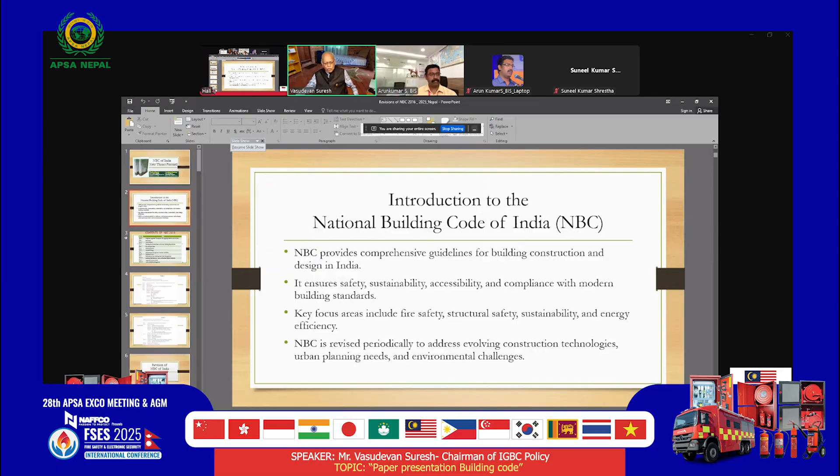I'm very happy you are having the thrust on fire safety and electronic security as far as this session is concerned. The building code is revised periodically to address evolving construction technologies, urban planning needs, and environmental challenges. No wonder after the 1970 version came, we had revised it over time.

The building code has got 12 parts. Starting with integrated approach, prerequisite for applying provisions of the code, coordination between all the professionals - multidisciplinary professionals, architects, engineers, structural engineers, fire engineers, MEP engineers, all concerned. That is Part 0, on coordination and integration.

Part 1 is all about definitions on all the parts of the code. Part 2 is administrative provisions, covering all the procedures required for the building permit and development permit, occupancy permit, including the NOCs from the fire and other authorities in a large way. It covers the administrative aspects not only at the level of building permit stage, occupancy permit stage, demolition permit, and all the related areas.

More will come shortly. Part 3 is on development control rules and general building requirements - all that is required to be done up to the plot, development control rules in the layout, subdivisions, for all situations. And of course the general building requirements - what should happen within a plot in terms of all the planning requirements.

Part 4 is very important, very relevant for your session. I understand yesterday Sandeep had already presented - our particular thing is also associated with the program on fire and life safety. Very important document, as good as mandatory, adopted by all the fire authorities, and the NOC from the fire authority is a must for giving a building permission.

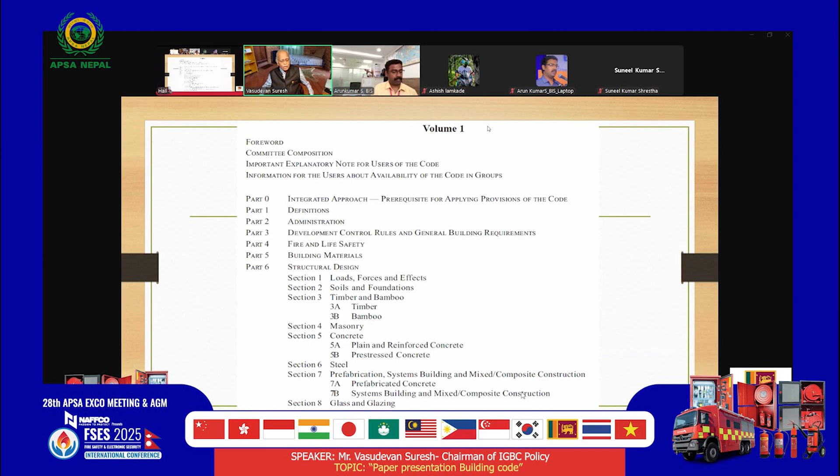Section 2 is on soils and foundation. Section 3 is on construction using timber and bamboo, very important. Section 4 is masonry, equally important for Nepal, stone and brick masonry, concrete - both plain, reinforced, and pre-stressed. Then steel, including composite construction, you'll see it very shortly. Section 7 is prefabrication systems building and mixed composite construction, and a segment on glass and glazing. A large number of buildings have the envelope with glass and glazing as a structural envelope.

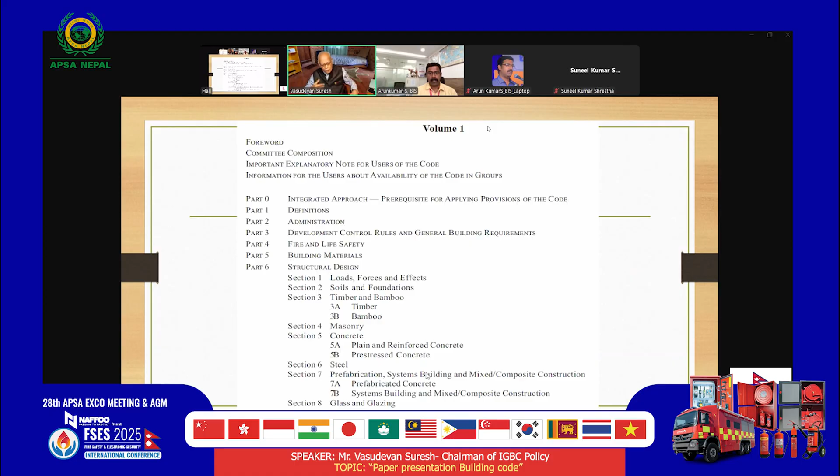What does it mean for structural designers? Very important, not only for the lighting and ventilation people, but also the heat insulation people. That brings us to the next component, part 7 on construction practices.

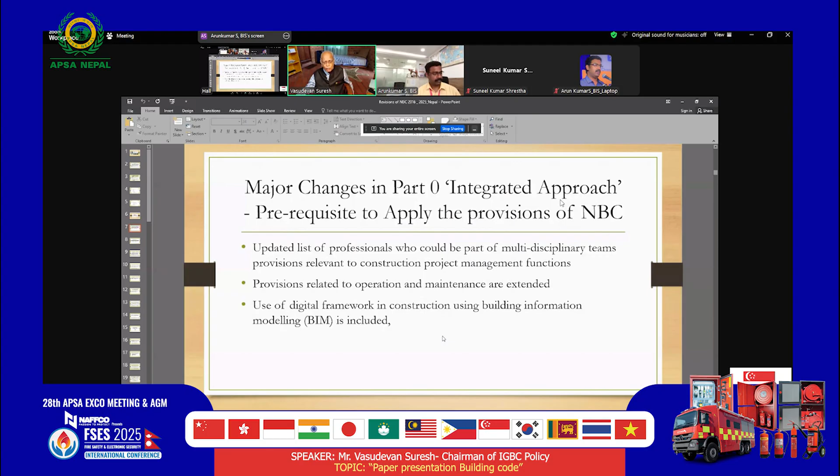Part 0 is the integrated approach regarding the prerequisites for applying the provisions of the NBC. This is a very important one where multidisciplinary teams work together - architects, civil engineers, structural engineers, geotechnical engineers, MEP engineers, landscape specialists, fire specialists, including groups dealing with green building rating. Coordination and integration is a major area, including operation maintenance, post completion, how the asset and facility management team takes over, and how all professionals can work together.

This gives you the particular - for the first time we have brought in BIM as an important component, the digital framework in construction using building information modeling, also included in part 0 of the 2025 version, which will also later come in part 7. Next please.

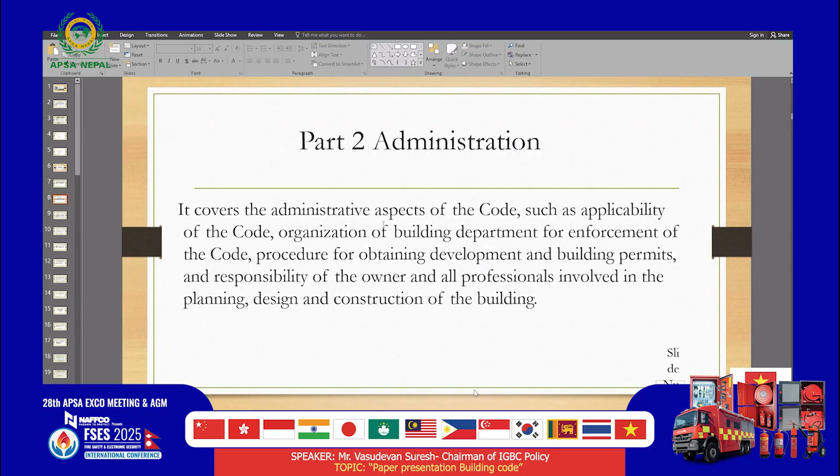We are given not only the qualifications, but also the competence and the level to which they can work. The next slide will give you further how we have, for the first time, included fire professionals and the type of requirements that have come in.

So you see we have simplified the detailed requirements of the permit application. We also include reporting and review mechanisms for high-rise buildings and special buildings, and procedures for permits, plans, process, and demolitions we have brought in for the first time. We also brought in improved oversight for periodic renewal of permits. Even if you get a building permit and the building is in operation, on structural audits, electrical audit, and fire audit, we brought in a 3 years or 5 years time period for renewal.

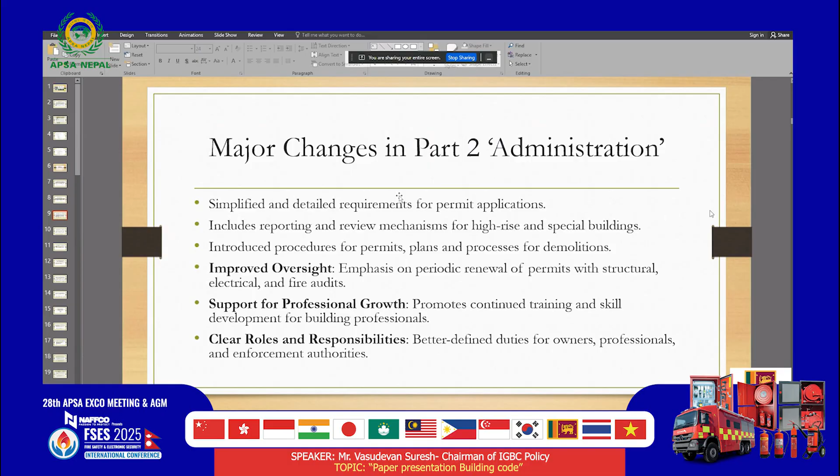This is again a very important cross provision in the building code. We are adding the right level of professional participation for the people dealing with this, and clear roles and responsibilities have been added for all owners, professionals, and enforcement authorities. This is very important: the people who sit in judgment to deal with the plan of any particular developer, or the construction department, or the government, should be not less qualified. They should be equally qualified to pass judgment on that.

So continuous training is required on behalf of the enforcement authorities. An enforcement authority can be not only the municipal corporation or municipalities, but also all the fire authorities, water authorities, pollution control, environment control, and fire people. All those people together are the enforcement authorities.

This is important because it encourages the involvement of the public in case of development work, building activities, special large buildings. Not only submission of the plan, but electronically you also submit - you don't require all the bundles of papers. Electronic filing of things is equally an important one.

We also identified the structural design basis report as an important component added in the building code for the first time, especially for earthquake zones, wind zones, and tall buildings of 50, 60, 70, 100-story buildings. So the structural design basis report is an important component for any building - special building or high rise beyond 15 meters or 500 square meters of area.

We also rationalized the activities involving alteration which do not require notice to authorities, and the format for applicable fees and charges has also been included in this in a very detailed manner.

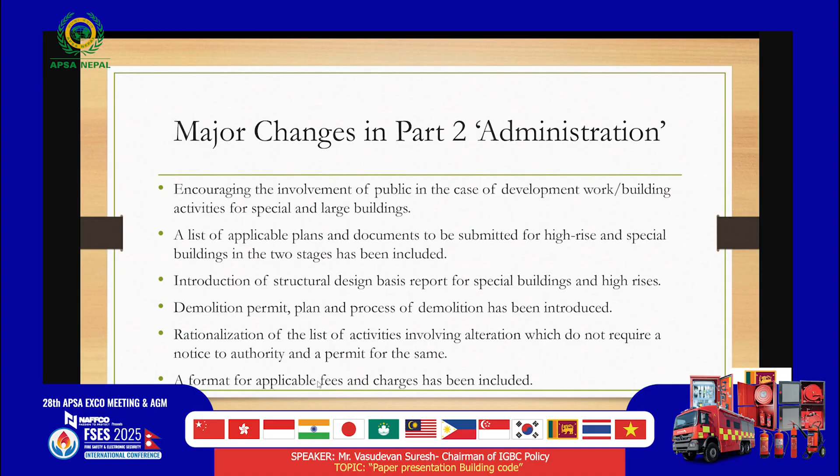Going forward, next slide please. That will bring us to further provisions on requirements in respect of all concerned professionals. We are given a useful flow chart for easy processing and approval, with time limits given for all NOCs to be given by the concerned line department, grant of sanction, refusal, occupancy permit. The structural design review can be done, rationalization, responsibilities of owner, part occupancy certificate in case the whole building is not completed or only part of it is completed - how we can do that.

Periodic occupancy renewal certificate for structural, electrical and fire - this is a very important clause added. Once we got the occupancy certificate, we never got into it again, but now we feel that's an absolute must that has been covered in detail, and permits also for signages, hoardings and outdoor display structures has been added.

As indicated, qualifications of all professionals, including fire protection engineers, have been added. For the first time, we have put in requirements for people who are dealing with fire-related work. What should be their minimum qualification and competence has been added, including, for that matter, the peer reviewer or proof checker for structural design.

So you see, Part 2 is a very comprehensive provision of the building, the development or the built environment, dealing not only with planning, design, construction, completion, occupancy, and performance of the building, but also till you can declare a building unsafe, till demolition, what needs to be done. All the procedures have been completely identified in a detailed manner.

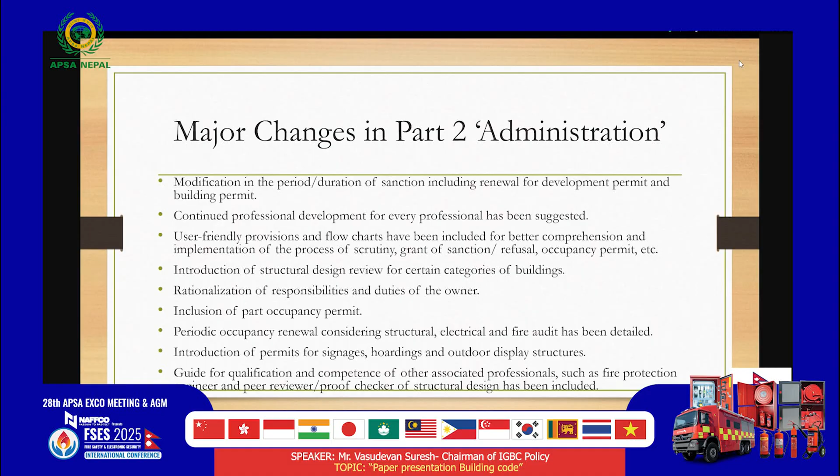Going forward, you have Part 3, which is the most important clause on development control rules and general building requirements to ensure health and safety of the public. All the planning norms, town planning requirements, the spatial requirement in a 3-dimensional form of X, Y, and Z are all covered in this particular thing in a very detailed manner.

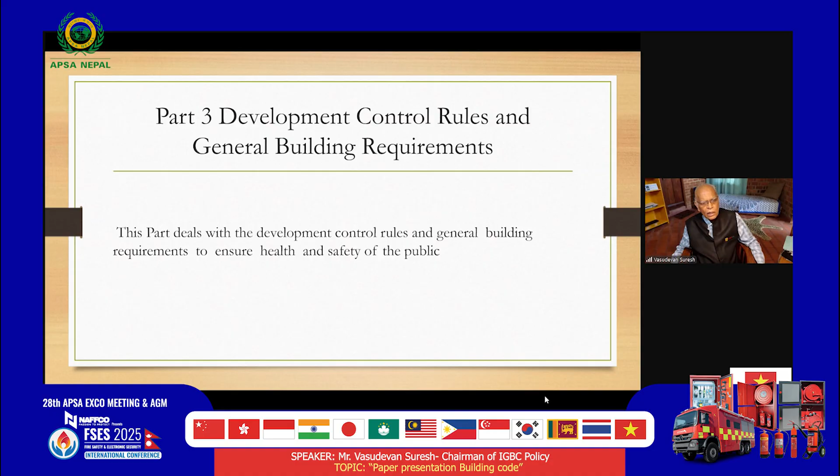Let's proceed further to the next slide. It covers enhanced accessibility with updated provisions for the elderly and persons with disabilities, including gender-neutral design, accessible transport hubs and specialized washrooms, urban design features including guidelines for spaces for creches and old age homes. It also covers coastal area development.

We have 7,500 kilometers of coastal area on the Bay of Bengal and Arabian Sea, and we have to cover the special requirements for that. We have updated land use provisions added, with revised classification for better urban planning, and improved access standards for roads, pathways, and means of access.

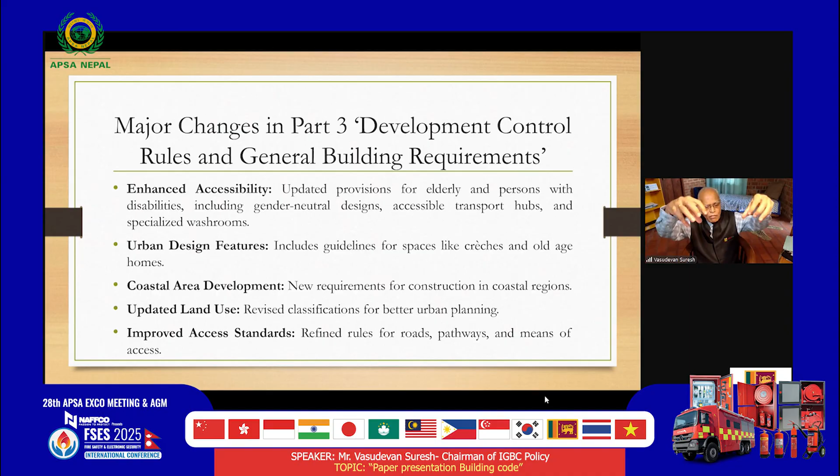This is very important from a fire point of view - how do you reach a particular building? Whatever clauses are required for the road concerned, the type of development, including the way in which you will be able to reach the building, are covered, including the required turning circle, etc.

Please go forward. The next slide will give you all the parking requirements that have been updated, reflecting the concept of all the parking spaces, including the ECS - the equivalent car space, including 4-wheelers, 3-wheelers, 2-wheelers, all the provisions required.

We also covered electric vehicles. Now that EVs have come in, what percentage of the car parking should be EV, because charging points are to be provided as part of the electrical installation in residential buildings, commercial buildings, malls, etc. Electric vehicles have been brought in over there.

We also brought in, for the first time, provisions for preventing crime and resilience against extreme events. As I already mentioned, coastal area development has brought in a lot of new tools for transferable development rights, accommodation reservation - these are all new planning norms. Compensatory floor area ratio, reservation credit certificate, purchasable floor area, transit-oriented development, all have been covered in detail.

Effectively, it covers not only all the development at the macro level, but also the micro level within a particular building - spaces within the building, how do you deal with each space, the minimum width, the area, the heights. All those details are covered, which normally the planners and architects deal with, including, of course, the engineers.

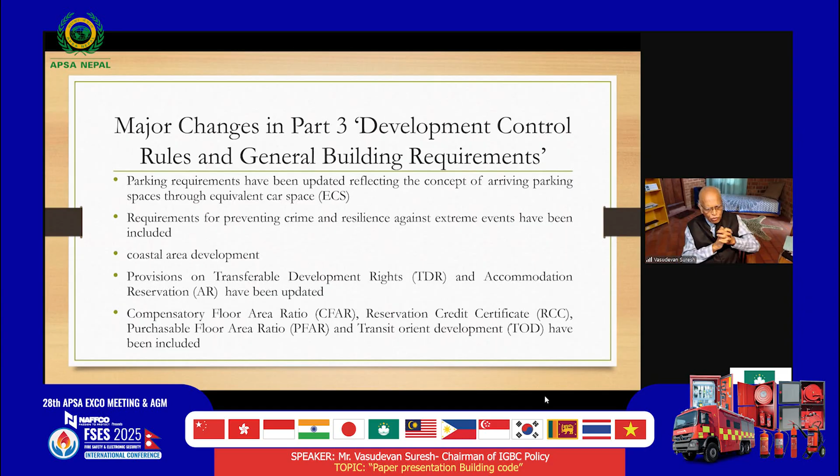Next please, can we go forward? That brings us to fire and life safety. I'm very happy that this has already been covered in detail yesterday by Sandeep Goyal and also partly by Shruti yesterday, so I won't get into it. All of you are gathered here, but I would have loved to speak on it for the whole day.

Fire prevention, life safety, and fire protection are the major areas of concern here, and we have gotten into it with a large number of increasing provisions. And you'll all be very happy to know that in a day or two, the Part 4 Fire Protection of the Fire and Life Safety, National Building Code 2025 document will come out for wide circulation.

I invite all participants in this program to kindly go through this document and give valuable comments. There are a large number of changes coming in the fire and life safety portion versus the provisions covered in the 2016 version of the National Building Code. As I told you, there were Building Codes in 1970, 1983, 2005, and 2016. So this 2025 version covers all the requirements for the nature of buildings in this particular area.

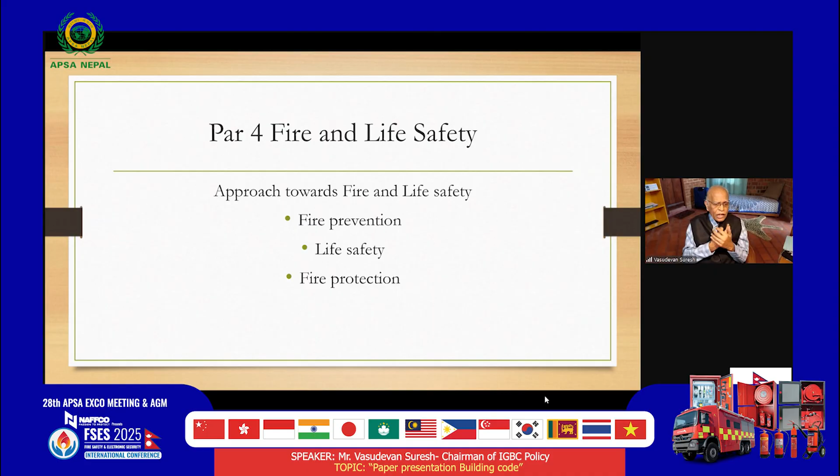Going forward, can you go to the next slide please? Enhanced fire protection standards, revised minimum firefighting requirements based on hydraulic calculation, updated fire resistance ratings for roofs on account of intermediate service and installation, clarifications on building design and usage, clear guidelines for measuring building height for different occupancies, because the requirements of firefighting also depend on the height of the building.

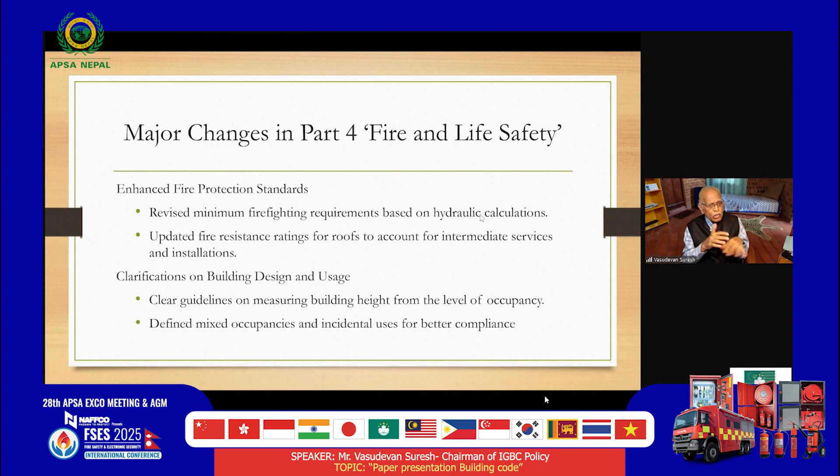Mixed occupancy is a very major component of residential, retail, and commercial coming in the same building. How do you deal with the right level of compartmentalization and fire resistance rating between one occupancy and another is covered in detail, covering practical requirements from a compliance point of view. This will become a very important clause of mixed occupancies horizontally and vertically within the building in a very large way.

Improved safety provisions on exits, with detailed requirements for exits, fire exit staircases, and occupant load. We have the fire tower concept which has become very popular, and this has been included and expanded in the 2025 version.

Fire safety measures for commercial kitchens, and Table 7 is a very important clause, completely revamped, covering all occupancies of the building and what nature of fire protection is required - be it wet riser, dry riser, sprinklers, or detectors. All the details of water storage requirements for the heights of buildings have been covered. Table 7 is a wonderful document.

We have covered high rises, EV parking areas, data centers, and in particular, transportation hubs like metro stations and train rails. Fire safety and life safety become important components in all such buildings because a large number of people congregate at one point of time. So those have been covered in a very large way.

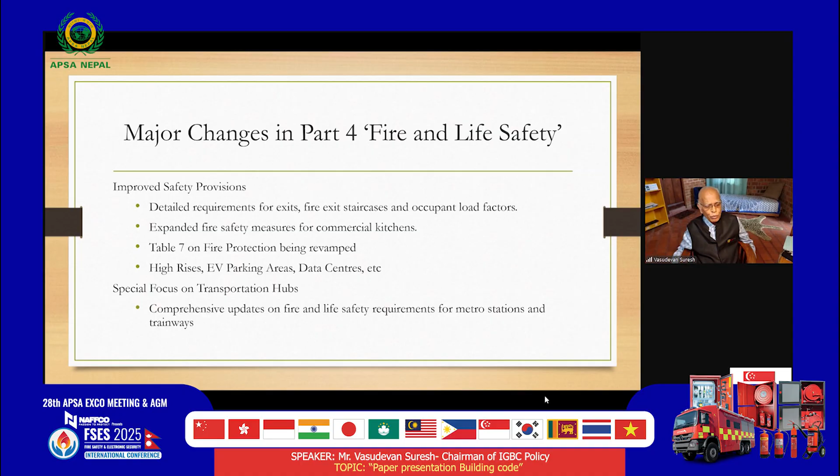This is important because Part 4 of the National Building Code has various clause numbers given, but this has a lot of linkage with our document on Part 6, Section 5 on concrete. For the first time, structural designs account for the fact that if you want a higher fire resistance rating of 2-hour, 3-hour, or 4-hour, the cover required for that design has to be more - it cannot be lesser. With additional cover, the fire can't reach the reinforcement. Therefore, structural engineers and fire engineers have to work together.

A very important clause has come in - minimum dimension for reinforced concrete members for fire resistance, and nominal cover to meet the fire resistance rating. Similarly for steel structures, between Part 6 Section 6 and Clause 22, 25 and 26 are covered - how steel-based construction will deal with fire resistance rating in terms of cover.

Electrical installation has many clauses - cable types, FR, LSH, metal sheets, security integration, location of MV, LV and switch rooms and other substations, smoke management systems, underground metro stations. These are all electrical installations but have fire resistance impact, so we covered between Part 4 and the concerned section. One part of the NBC is on the left-hand side, the second is the NBC Part 4 clauses, and the component is covered in between.

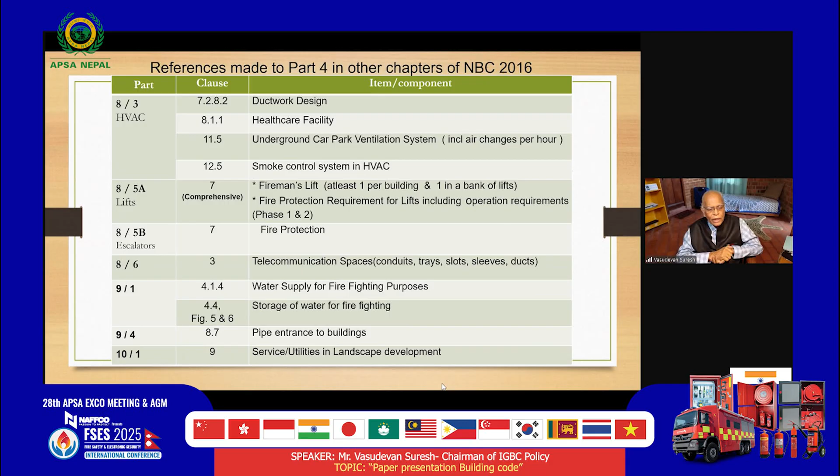Going forward - kindly wait for the next 2 days' time. Part 4, Fire Protection, National Building Code 2025 document will become a public document. Everybody can participate and give their valuable comments on that. We are extremely happy that we have tried to make it a state-of-the-art document, as good as any document anywhere in the world, keeping India's development requirements over the next 15-20 years in mind - heights of buildings, nature of occupancy, etc. Everything has been covered.

Part 5, building materials, is all about new building materials - be it cement, steel, glass, aluminium, brick, whatever. All the 500 odd building materials are covered, including permitting innovative and alternative building materials, provided you can prove they are good enough for construction, performance-wise, and that they work well. So if you don't want to stop any new material from coming in, there's an enabling provision to provide for that.

And alternative construction - encouraging modern, efficient, resource-conscious building technologies, green products, less embodied energy-based building materials - as long as it meets functional requirements: structural sufficiency, thermal insulation, sound insulation, water protection, all those functional properties of a building material. We don't want to stop that. If I have a new product, I'll permit it, provided that product can withstand use as a wall or a roof or a door or whatever. We don't stop that.

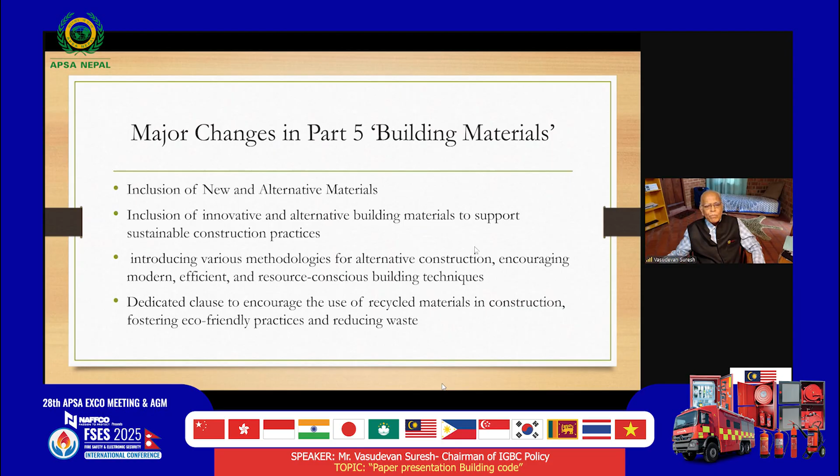This brings us to the most important clause, Part 6, structural design. Next clause please. The structural engineers will play a very, very powerful role in this particular clause. Yeah, there you are - and this has got, as I said, 8 sections.

What I will take maybe one slide later on - I'll request Arun to open up on that, my colleague who is working on the National Building Code clauses. We have a separate specialist panel for each one. By the way, each part of the National Building Code has got a specialist expert panel to deal with it. Everything I told you up to Part 1 to Part 5 - they are special. There were 23 expert panels, with about 1,300 expert members working on that.

Structural design, loads, forces, and effects will cover not only the requirements of live load and dead load, but all the imposed loads coming in terms of forces - earthquake forces coming below the ground, wind forces coming above the ground, and landslide loads, etc. - all have been covered in a very, very detailed manner.

I'm extremely happy and proud that this particular part covers not only IS 875 on wind load, IS 1893 on earthquake codes, but also cyclone-related issues - they've all been covered. All the structural engineers sitting in this group revised the design earthquake hazard across the country comprehensively, based on probabilistic consideration, with the deterministic hazard taken as a minimum. Displacement hazard is also brought into focus.

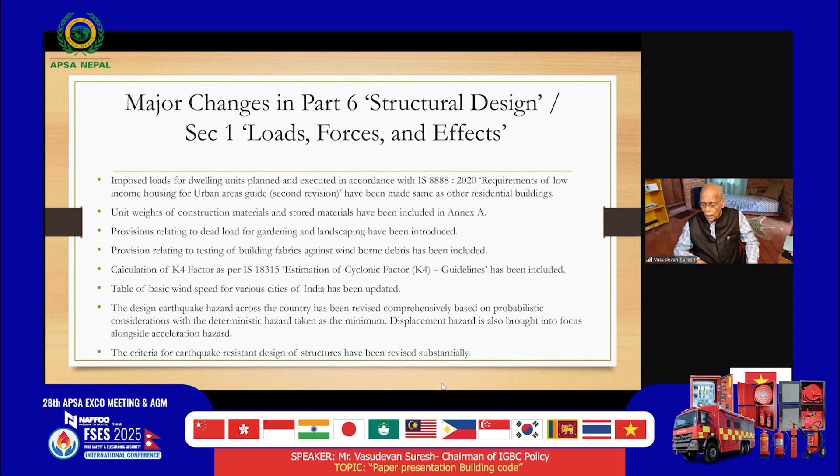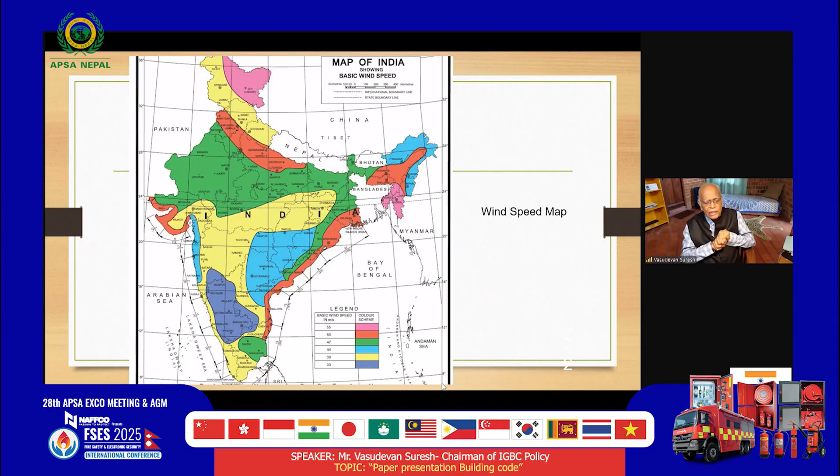If you go to the next slide, our seismic zoning map has also undergone a major change. This, of course, is a wind zone map, which is available depending upon the pressure coming from typhoons, cyclones, at periodic intervals - that's what we deal with there. If you go to the next clause, you'll see the next one on the earthquake code.

A seismic zoning map - the 2016 version has only 4 zones, from 2 to 5, with Nepal mostly coming under zone 5. But I want to indicate that the new National Building Code 2025, covering IS 1893 latest version 2025, has got 6 zones. That means the earlier zone 5 has now been made into zones 5 and 6 - those which are more intense, especially in that area. I think the Nepal region, which is co-terminus with our particular area, will partly come under zone 5 and zone 6. This is very, very important, because the design forces for earthquakes have all been rationalized in line with the latest provisions.

You are keeping on seeing the type of earthquake damages in neighborhoods, in Myanmar just a few days back, as well as recently in Bangkok, and what's happening in Indonesia. So we want to be sure that our provisions of the earthquake code are in line with the latest thinking on this particular subject.

So that is an important point at which I'll ask Arun to chip in and take over from here, starting from the next slide. Sure, I'll cover slides 7 or 8, and come back again. Yeah, please go ahead. Thank you, Suresh. Good morning, everyone.

So apart from the wind speed map and the seismic zoning map of India, a good portion of the hills in the country receive snow. This map gives the intensity of snowfall, collected based on a periodic study of snow accumulation at various parts of the year. Based on that, the map has been derived, and it serves as a basic guideline for a structural engineer when he designs a roof, whether it's a flat roof, a hip type roof, or a sloped roof.

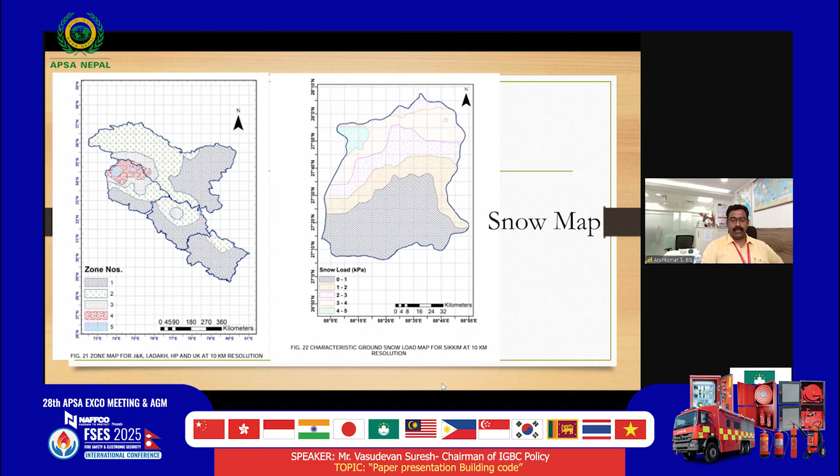What factors should a professional ensure so the design is sufficient for that particular snow load to be accounted for? These are some states in the country where snowfall has been found abundant, and that load of snow has to be factored into the structural design of the roof elements, and accordingly from the roof elements to the columns, beams, and all the way up to the foundation. A detailed calculation is also suggested in Annexure M of this draft of the NBC.

At times, even after the snowfall, there's a ponding effect due to melting snow, and a mixture of water and snow remains for a considerable time unless totally drained out. The safety aspects to take care of here are also given. More importantly, the provisions relating to blast loads are an option, not mandatory for all buildings. We've left this Annexure Q for professionals so they can decide along with the owner.

In the next section, as you'll see in the next slide, we'll be speaking about structural design using steel.

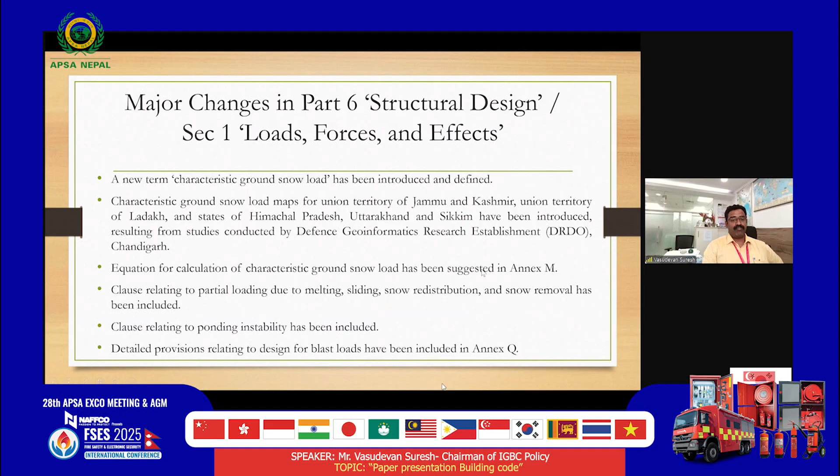Regarding soils and foundation, once the entire load has been ascertained in a building, that load has to be safely transferred back to the soil. It's not always possible to have virgin soil with enough bearing capacity; sometimes it's reclaimed soil or filled up earth. First, one needs to ascertain the bearing capacity or strength of that particular soil, and a variety of techniques have been mentioned in the standard for how a professional will ascertain this, done either by manual or mechanical means.

Some of these methods include wash boring, as given in the fourth point, and pore water pressure measurement, because the presence of water in the soil reduces bearing capacity. Similarly, seismic tests are detailed, since standardizing a test method is most important, else the parameters are bound to vary. So the role of the standards body in firming up that test method has also come in.

When the size of the building is quite huge, you may need multiple such analyses of that soil. It's not just one site or one pit, but multiple pits across the site. All this is given, including SASW test, MASW test, and dilatometer test.

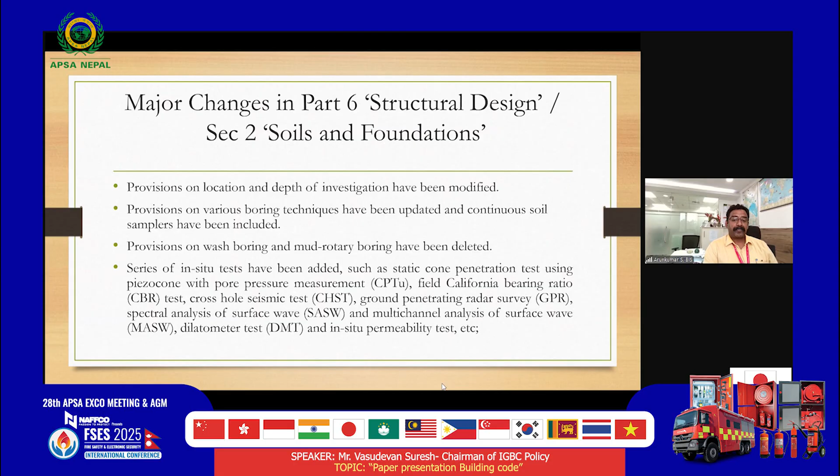This time we've included details on optical and acoustic televiewer methods. When piling or pile type foundation work happens, one can put a camera to visually see the stratification of the soil as we go down, giving a realistic appreciation of soil change at various depths. Pressure meter test has also been detailed, along with deep foundation, which is essential because building heights are rising day by day, with very tall buildings from 50 meters to 250 meters already coming up in a big way across various cities in the country.

Special types of deep foundations have been included. Last week only, the combined pile raft foundation standard was released by the BIS with a separate IS number. Provisions of that have also been included in section 2 on soils, and instrumentation techniques have also been detailed for the information of users and professionals.

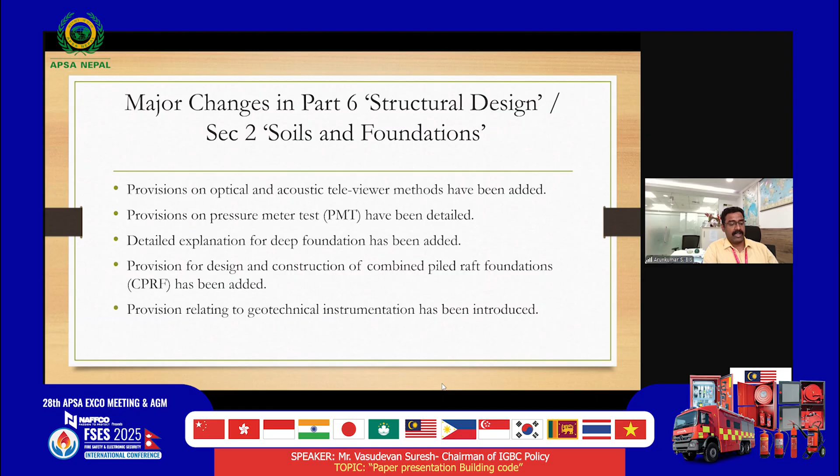Next is section 3 on timber and 3B on bamboo. In chapter 3A, not only virgin timber but also engineered timber can be used by professionals. What are the requirements and properties of engineered timber, particularly cross laminated timber? How do you ascertain those properties, what amount of glue goes into that CLT, what parameters are to be evaluated, and what is the test method for evaluating those parameters?

Based on the test values only, an engineer will arrive at the sizing of the element, be it a timber CLT element, beam, column, truss, rafter, or any other foundation element, or a roof slab element. But use of timber has to be done properly.

We just heard another presenter, Dr. Basro, mention forest fire in a big way. Such fires can obviously happen within buildings also. So how do you ensure that buildings are fire safe, particularly timber buildings? These aspects, apart from Part 4 of NBC, are also covered in section 3A in this revision.

Any material should be used to its full maximum potential lifetime by suitably preserving and protecting it. Timber and bamboo are such organic materials. They need to be properly protected from the effects of borers or termites, etc., so that they can have a prolonged life.

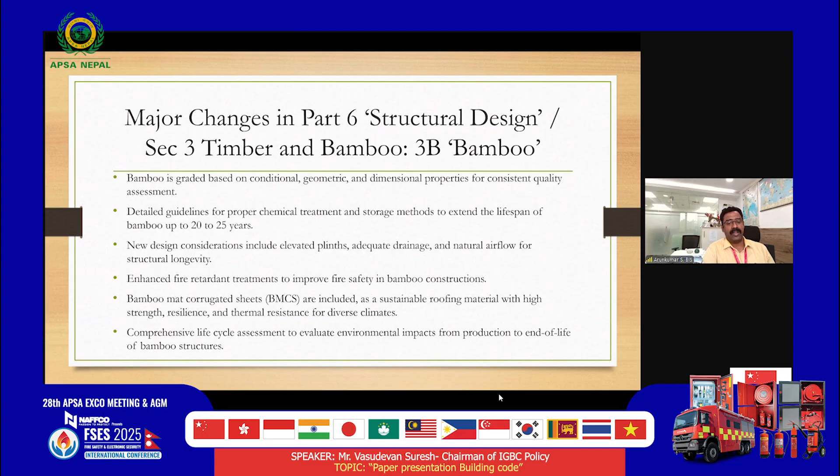Next comes masonry, which both India and Nepal share in common. More than 90% of construction in the country is masonry. The NBC has been very clear that not more than 4 stories, that is ground plus 3 stories, is permitted for fully 100% masonry construction. Otherwise it is called infilled masonry in RCC or infilled masonry in steel building construction. If somebody has 100% masonry, then he cannot go beyond 4 stories. That clarity has been brought in.

Newer types of masonry bricks and blocks, including using locally available clay and earth strengthened using cement or gypsum, have also been permitted. There are limitations in use of, for example, rat trap bond masonry, only up to 2 stories. That has been clarified, very effective for the seismic regions of both Nepal and India. We can use confined masonry and reinforced masonry, for which detailed provisions are given.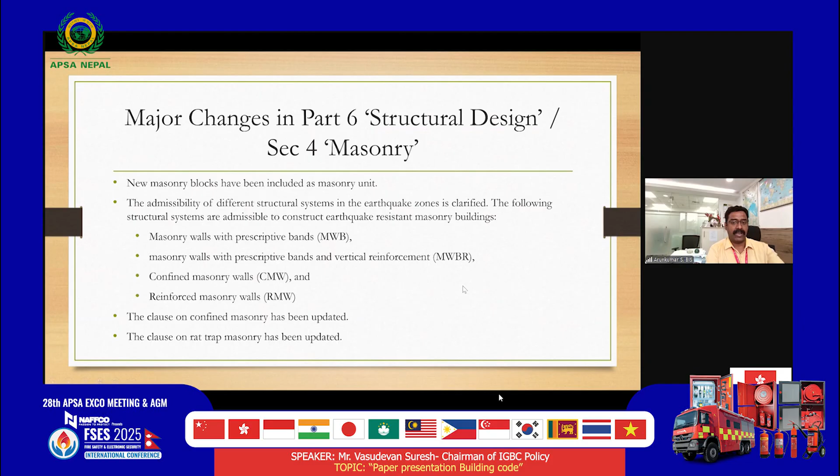There are many new materials coming up in the name of high strength steel and high strength concrete. The requirements, limitations, and permitted usages are all being provided in this revision of section 5 of NBC. The design service life has been brought in, and most important of all is the fire resistance rating.

Regular concrete has got, say, X minutes of fire resistance, but if you have high strength concrete, you will be surprised to know it has got a lesser amount of fire resistance rating. The high strength concrete turns brittle when subjected to the same fire temperature. So how do you protect that particular high strength concrete? Those guidelines are coming up in the fire resistance chapter.

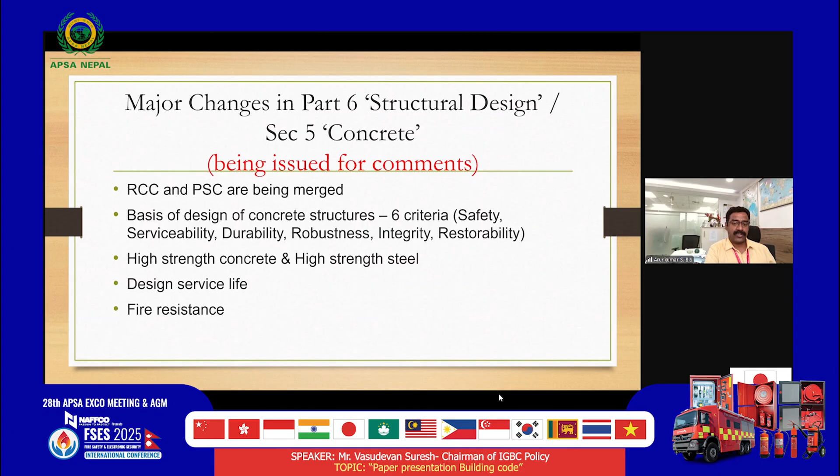Next 3 slides are regarding steel as construction. Structural steel is nothing but IS 800. What we have done in this revision is the steel chapter, section 6, is divided into two: only steel, and then 6B on steel concrete composite.

Coming to steel, the basic materials are taken up from our MTD metallurgical division, for example IS 2062. That metallurgy department has also got separate Indian standards on fire resistant steel, weather resistant steel, and steels which have performance with respect to seismic effect, that is the US by YS ratio - ultimate strength by yield strength ratio.

That is all guaranteed when a person goes for IS 15962 steel section, so that it can be used in earthquake prone regions, so that your construction joints, particularly beam column joints, will perform properly, and give enough warning at those beam column junctions. So a building, in case it is subjected to an earthquake or dynamic loading, will not crumble at one go. That is a warning, and based on that warning sign, the owner or inmate can get out of the building and structural intervention can happen.

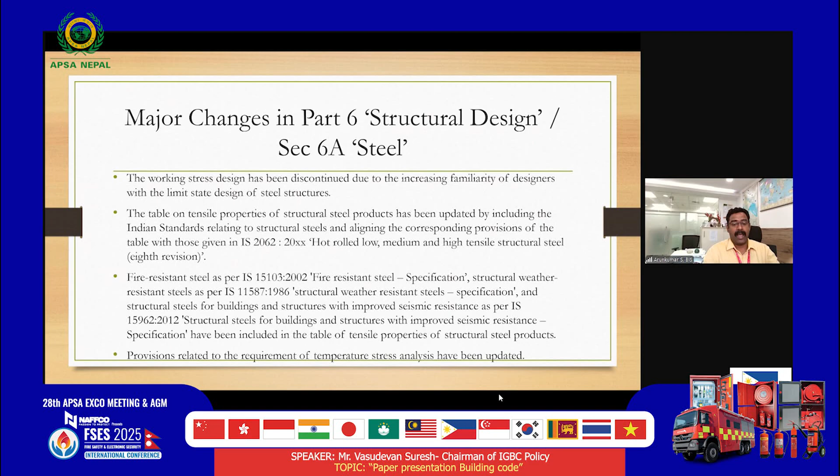Next 2 slides you can skip, it is all big way detailing on steel only. In this country also, in India also, steel as a construction material is slowly picking up. You can skip this one.

Next, on 6B, steel concrete composite construction - traditionally that has been used only in bridges and flyovers largely, but that has now been permitted in buildings also. So what are those shear connectors and what are those performance requirements for steel and concrete, how that composite section is going to behave - the developments over the 11384 standard have all been covered in this chapter.

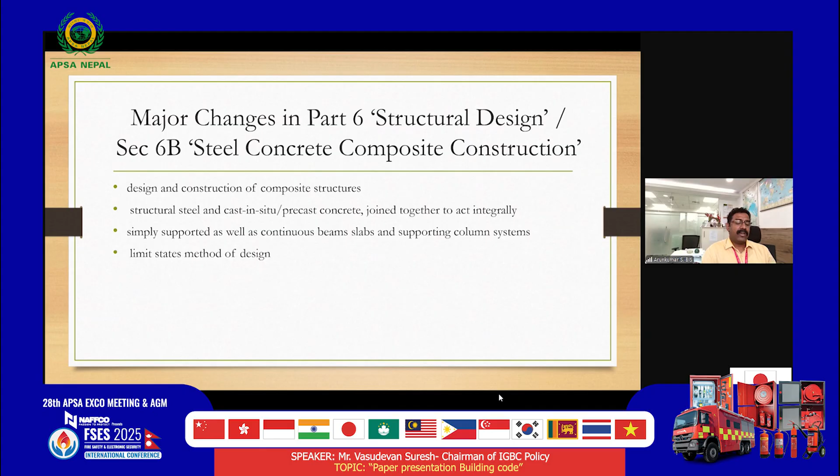In the next slide, industrialized construction by way of prefabricated concrete construction has been covered. The order of the day is to finish the building in the quickest possible time. That is possible if the entire element of a building is factory made and shifted to the site, assembled like Lego, and connected only at the joints. The code is very clear that it permits the wet jointing system and not the dry jointing system, because with the wet jointing system we can ensure that the column or beam or wall-column combination gains sufficient strength. And not only strength - the performance with respect to water in wet areas like toilets and kitchens will also perform properly.

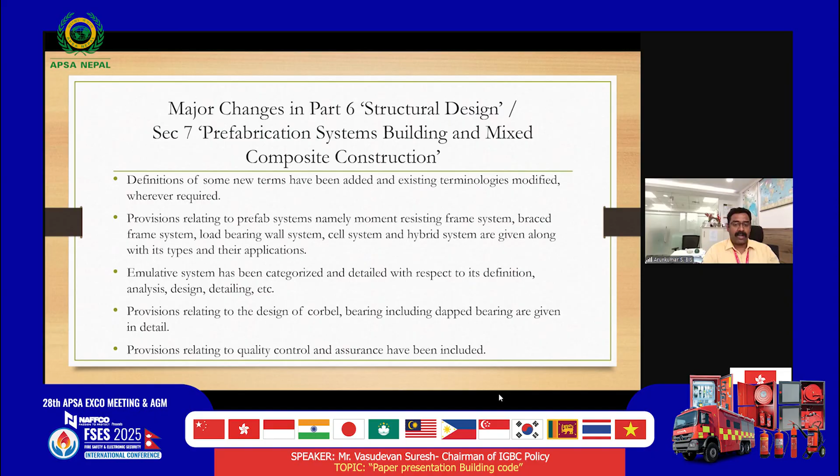In this revision, 3D printing construction has also come in, and more importantly, this PPVC - prefabricated pre-finished volumetric construction. So everything is set - it's not just a building element, a bedroom, a toilet or a kitchen - it comes with its electrical line, plumbing line, water line, even all its water closets, everything fitted in the factory. The unit comes in a truck. You only have to use a crane, put it in place, and then do the wet jointing. That's all, not even painting is required - you just have to connect the plumbing line and the electrical line. The building is ready in a matter of days. That is the level of introduction of these provisions in Annexure B.

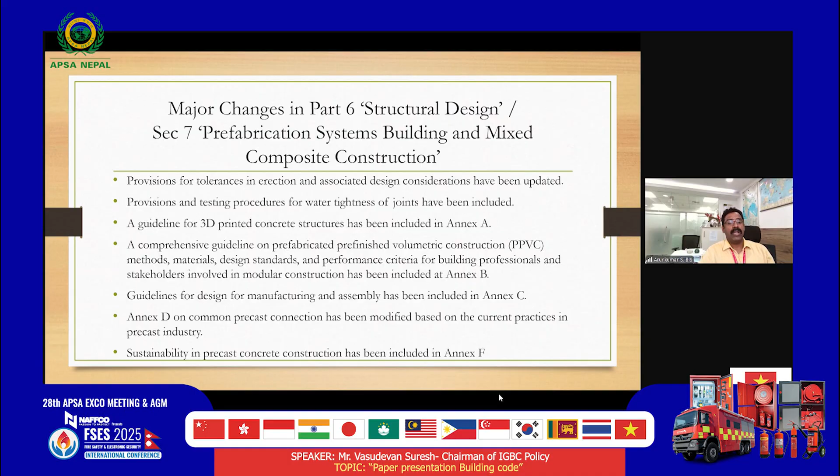And in Annexure C, in this revision, specific guidelines on the assembly have been detailed in this chapter. Next slide talks about glass in buildings, that is section 8. Mr. Suresh just mentioned that part 6, structural design, takes care of 50% of NBC, because that is the backbone or the skeleton of the building.

Not only now, but for about 15 plus years in the country, the use of glass has come up in a big way, not only in India but across the globe, because glass is such a material with which one can connect to the outside world. But both countries, India and Nepal, for example, have got plenty of sunlight coming in, so we should be very careful in only using the light portion of it and not the heat portion.

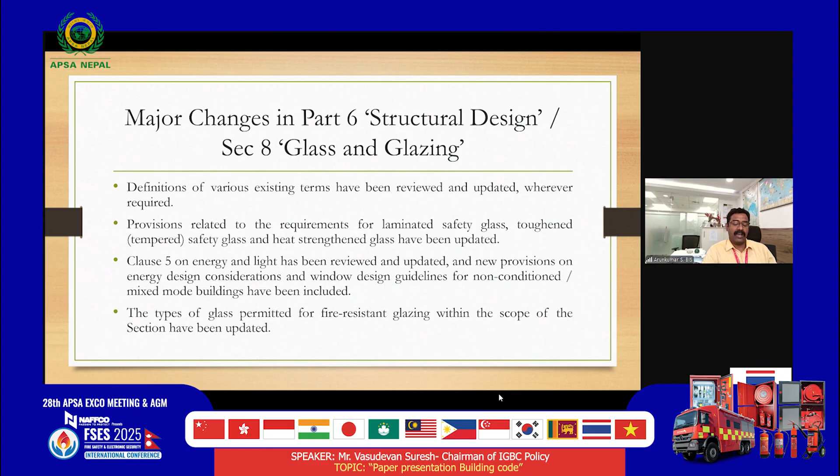So what are those requirements in terms of selection of glass, glazing elements, and framing elements, be it UPVC, timber, aluminum, stainless steel or any other plastic material? Those guidelines are given. The major revision in this is regarding fire resistant glazing. There are 8 special types of fire resistant glass which can be used, and it also talks about an optional category of blast resistance and bullet resistance.

This is not required for all types of buildings, but is required for specific building occupancies, say a politically important building, or the Reserve Bank of India, or hotels very near the airport. For such buildings, the airports authority itself has been emphasizing that certain facades or walls should have glass which ensures that no penetration of bullet, etc., is going to happen.

Next slide onwards, I would request Mr. Suresh to take over. It talks about part 7 onwards, on construction management practices and safety. Thank you so much, Arun, you did so wonderfully. Part 7 is all about practice. Now that you have designed the building architecturally and structurally and the material is there, you get onto the site for dealing with construction management, practice and safety.

It talks, for the first time, about including the construction demolition aspect. A large number of buildings, even redevelopment of an existing area, have to be demolished. How do you do that in a very systematic manner? It's been covered in detail.

All safety aspects are also covered there, and information with respect to BIM has been brought in a comprehensive manner for building information modeling of planning and design, so that everything goes in a sequential manner. Every drawing has to be linked to the BIM related drawings, and the clause for permit to work system has been added, ensuring stricter control for high risk activities and concerned sites.

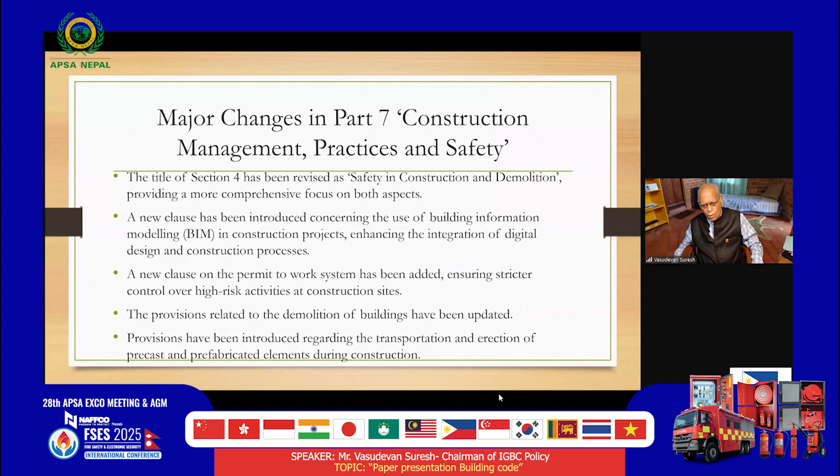This is regarding barricading and construction. I'll just say, shoring excavated soil, monitoring adjacent buildings so construction should not affect the neighboring area, improving safety and minimizing risk to the surroundings, and also making the construction management and supervision team responsible in a large way regarding anchoring of various non-structural elements and building services, because the service people will also come there.

As you see, the next parts are part 8 and part 9. After the main structural part comes, building and plumbing services come in. We have special provisions added for marine, hill and snowbound areas - what type of problems are involved in those environments, and construction safety related issues and what needs to be done have been covered in depth. I think these provisions will have substantial use for the Nepal context, which has hill and snowbound areas in a big way.

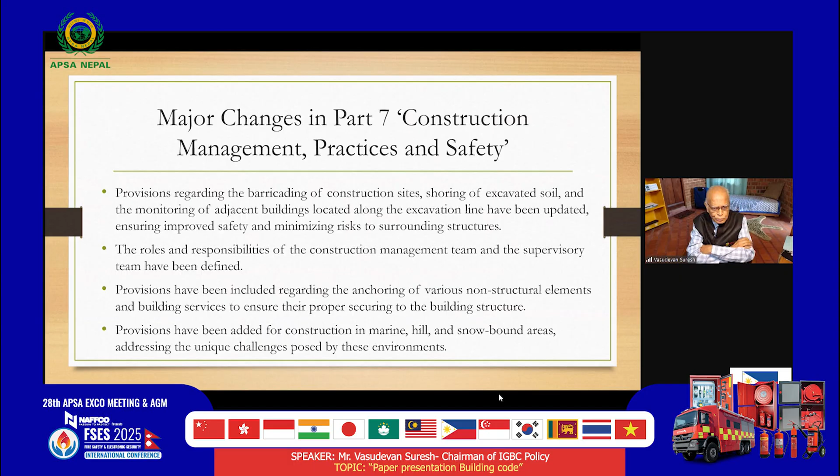Equally important are the non-structural elements and finishes. So structural, non-structural, and finishes and building services like fixing of glass and fixing for maintenance, all these have been covered in a very detailed manner.

The proficiency of construction engineers, not only the design engineer but the one who can supervise, and the construction engineer's qualification - because they are the ones going to be at the site to deal with that - the link with structural engineers has been brought in. We have brought a subtle difference between a structural engineer who can design it structurally and give the detailed drawings, and who can go and supervise. It need not necessarily be the same person; it can be from various areas, but the good-for-construction drawings with structural steel details etc. will be coming to the construction engineers.

The link has been brought in there, and special provision for thermal insulated glass and glazing has been added, along with development of emergency response and disaster management plans for construction sites - what will happen in case of especially hazard prone areas.

Something happens, a landslide or an earthquake or whatever, a mudslide, what needs to be done - all these have been covered in a comprehensive manner.

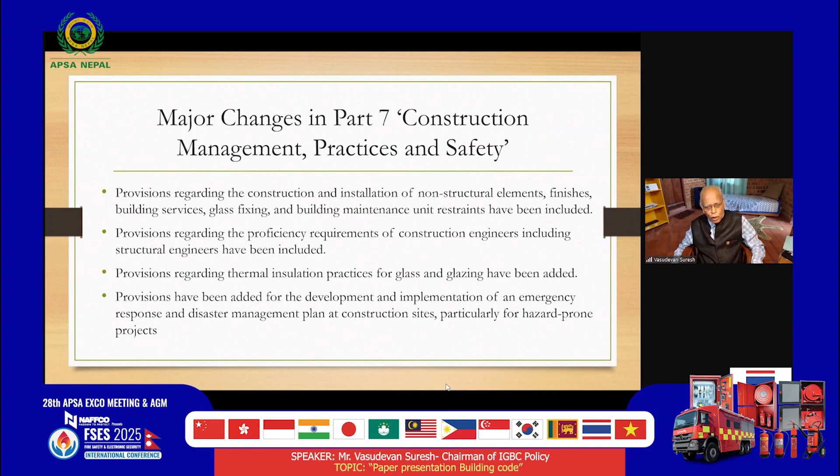A very important part, according to me, is Part 7. Going forward, next slide - that I told you is the building services one.

We've got about 6 sections. The first is lighting and natural ventilation, covering all aspects of it. As Arun said, 95% of India uses what's called the clear design sky, unlike all over the world which uses the standard overcast sky. So Surya Bhagavan is extremely useful for us - how you use daylighting in a large way, planning, right orientation of the building, illumination levels required, how to get light in and not heat. The circadian lighting system, outdoor lighting system, all have been put in a detailed manner, along with required illumination levels and how to deal with that, including artificial illumination aspects.

Natural ventilation is covered here, while mechanical ventilation comes in Section 3 on air conditioning. But artificial lighting will also come in here, especially during the night period. Orientation of the building is an important clause that architects, planners and engineers use, depending upon the movement of the sun from east to west, since we are in the northern hemisphere. Those detailed aspects are covered in a very minute manner.

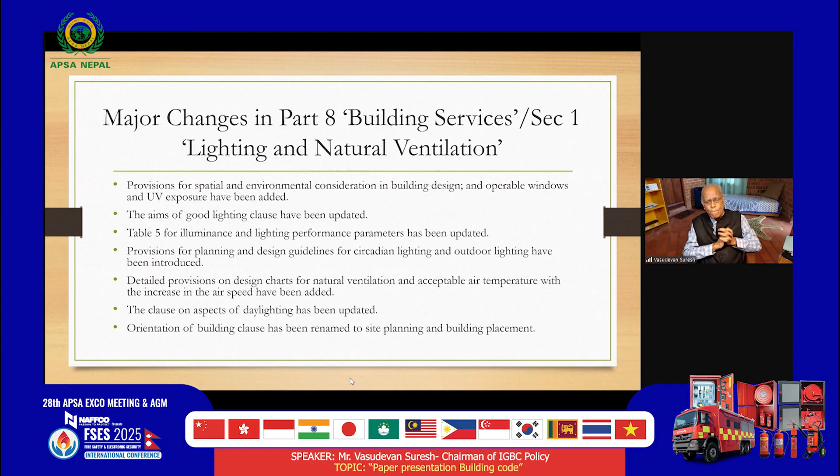Going forward - electrical installation, I think we already have covered. We are extremely happy and proud; this is a very important document. All buildings require power, and safe electrical installation is the most important thing the electrical engineer does, in line with the Indian electricity rules and acts.

Those provisions have been taken into account. We also have the National Electrical Code separately brought out by the Bureau of Indian Standards. The National Electrical Code will primarily apply at the higher level of electrical installation, but at the building level, everything comes in the National Building Code, Part 8, Section 2, electrical installation.

The electrical safety aspects - yesterday Shruti made a presentation already; she's also associated with this part in a large way, covering the planning of electrical installation and design issues on apparatus, etc. Where do you put the substation, transformer, standby generator, and the nature of wiring - right from selection, installation, circuit segregation, mitigation, and electromagnetic interference - all have been covered. We're extremely happy that this part was done with the best possible electrical engineers in the country, working with civil engineers, architects, the MEP team, and fire safety.

Whenever there's a fire, electrical short circuit is often blamed as the reason for the electrical installation. So we can't let that happen. We want to ensure safe electrical installations in line with the latest provisions required. More importantly, with renewable energy coming and linking with the grid - how do you link solar energy along with grid energy to be utilized in the building - that's also an important component, including electric vehicle charging points.

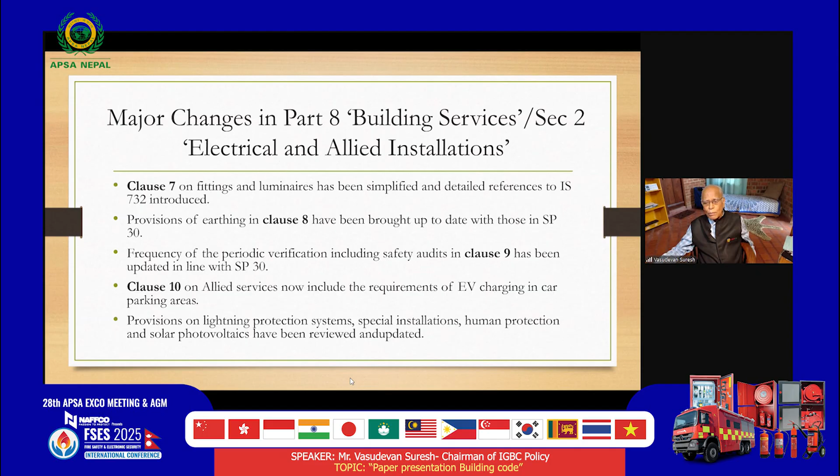Lightning protection is an important component - very high rains and all that, India has this problem, and you have it too. How do you protect buildings with lightning protection in a large way - special installations, human protection, we don't want any damage to happen, more so with solar photovoltaics, etc. What type of precautions are required has been covered in a very large manner. Can I have the next slide, please?

Yeah, this will bring us to the most important one, HVAC: air conditioning, heating, and mechanical ventilation. As I told you, section 1 gives only natural ventilation. Mechanical ventilation will come over here.

All aspects of the design of air conditioning have been brought in over there: new refrigerants, zero ozone depletion, minimal global warming impact, energy efficiency enhancement, promotion of software tools for precise energy calculation and system design, encouragement of energy efficient variable refrigerant flow (VRF), and inverter-based cooling and air conditioning, the best solution.

At one point of time, India used to have 150 to 200 square feet per ton of air conditioning. Today we have buildings with even up to 1,000 tons, done with 1 ton covering 1,000 square feet. Can you believe from 200 square feet per ton, we can now go up to 1,000 square feet per ton of air conditioning? The nature of air conditioning has undergone phenomenal change with the latest technology in that area. All of this has been covered in this particular part in a very detailed manner.

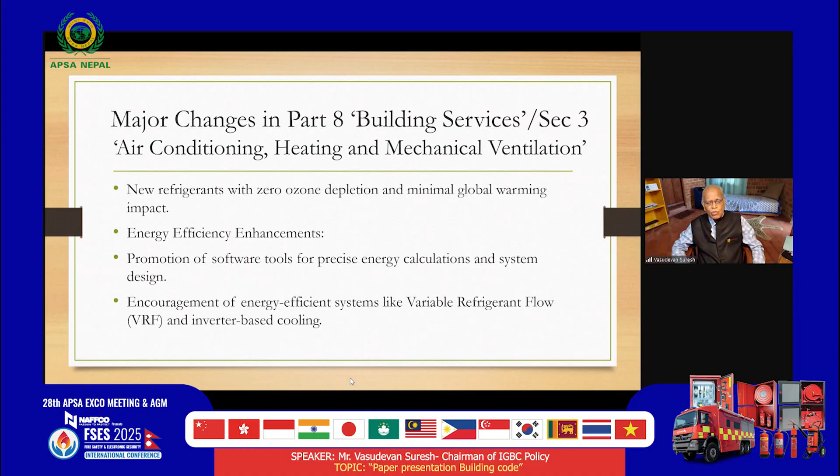Going forward, next slide please. Updated weather information is also available for all 60 cities for tailored system planning. Refined indoor design guidelines have been brought in for local climatic conditions. Cold storage is an important one. Refrigeration area, especially food preservation, is important, especially in Nepal and the hill districts, which also need to take care of preserving food, reducing waste in a large way.

Enhanced ventilation standards to ensure fresh air supply - this is an important component. Fresh air supply, especially for lower basements and all, has been covered in a very, very minute, detailed manner as far as is concerned.

Some portions also cover heating, especially in the northern part of India where there's snow. The same system can be used for heating purposes too. So it covers both air conditioning for cooling, heating for the northern part of India - maybe Nepal would also require some of it - and mechanical ventilation.

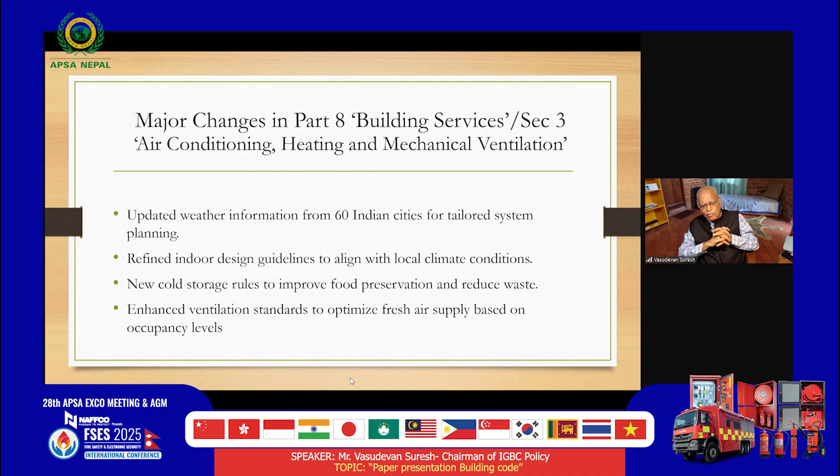Next slide please, next slide please. Very important: acoustic sound insulation and noise control is a desirable functional requirement. It's not a safety issue, but safety from noise control becomes an important one.

A large number of very useful provisions for acoustic shielding during infrastructure development, large highways and all - noise control becomes an important component. These are covered: detailed design requirements, performance evaluation of noise barriers, and effective noise mitigation have been covered.

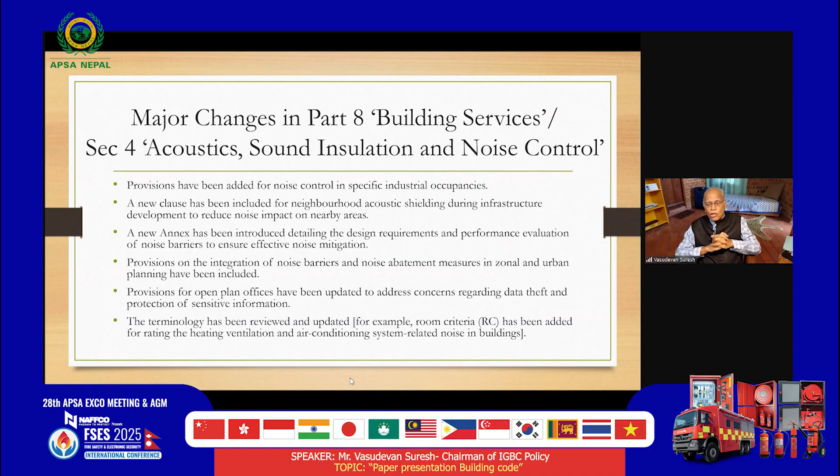Lower levels of sound are needed in quieter areas - libraries, schools, hospitals, etc. - where acoustics levels are needed, whereas noise control is required for the outer end. Both are covered in a very large way, and we have covered these provisions in a very detailed manner as far as this particular requirement is concerned.

Next slide please, next slide please. Lifts - vertical transport is a very, very important component of all tall buildings, especially with basements. We had two sections earlier, 5A and 5B, but this time we have 5A, 5B, and 5C.

5A will cover everything about the vertical lifts component, including the double-deck lift system, which is the latest approach - one cabin above the other, with independent cabin systems for improving efficiency and reducing waiting period. There are also fire safety aspects.

It's also a requirement for seismic safety, because the lift machine and cabin can have movement. What type of special precautions are required has been covered for safety mechanisms on the clearance of the lift well, and also the guide rails and related design in a very large way.

Next slide please - 5B. These are all the details. Zoning-wise, you try to cover a 100-story building - how do you bring zoning, separate cabins? We can bring all those details.

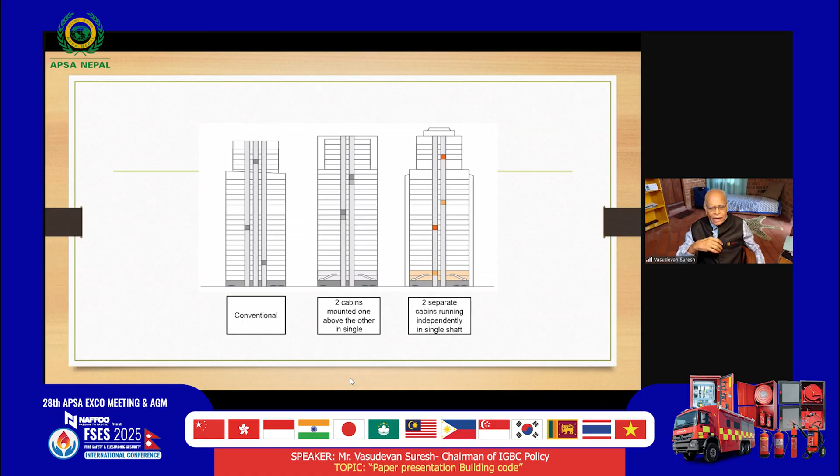These are very detailed provisions, especially for taller buildings of a very large nature. We've mounted these aspects in a very detailed manner. The elevator experts are very happy with these latest provisions, because that really provides a solution. If you want a 50-story, 60-story, 80 or 100-story building, which are more and more coming in India in a very large way, it covers that in a detailed manner.

Next slide please. This is, of course, a detailed one. The destination control system is added, including the single-deck lift and double-deck system, which I mentioned about.

Special provisions on fire safety, the fireman's lift with fire-rated doors and emergency speed criteria - all of you should be very happy, because this covers fire service and electrical services. Evacuation strategies and enhanced operational features are also being covered in 5A.

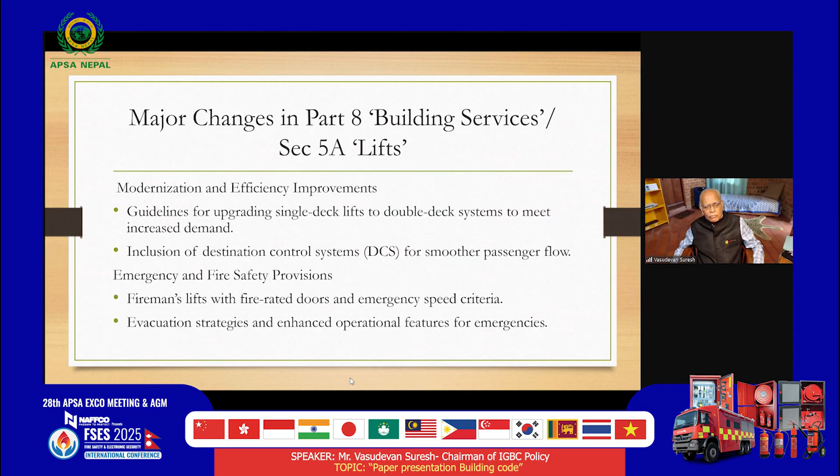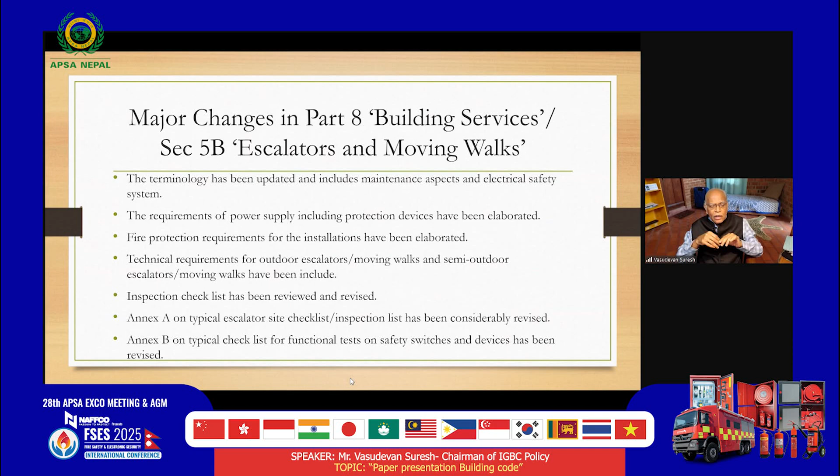Most important: escalators, the diagonal and horizontal travel, or moving walks. Very important for large number of buildings, including malls, airports and other related ones. These have been covered in a very detailed manner. I'm extremely happy that the provisions are done in line with the latest state-of-the-art technologies available anywhere in the world.

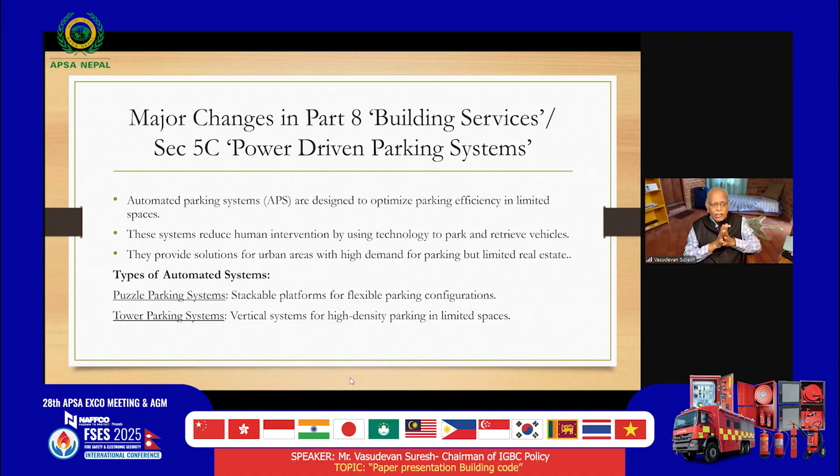This brings us to automatic parking systems, power-driven parking systems - elevators only bring that particular one. So this code has brought in power-driven parking systems in a very large way. APS is a new provision that has been added. Puzzle parking system and tower parking system have been covered, which gives high density parking with a stackable platform, or vertical high density parking with limited space. These are important requirements required as demography and population increases, spaces become lesser, and parking vehicles become more. How do you provide parking provisions in a very large way - that becomes a big challenge. We have covered that in a very detailed manner, bringing us to automated parking systems.

Large number of buildings in India have not only the mechanical system and the hydraulic system, using the pulley mechanism or hydraulic cylinders for auto-designated platforms, and these are working very well. The safety aspects are very important to give automated parking systems. Especially big cities of India are already having automated parking systems, so these clauses will be extremely useful for that in a very large way.

Sir, we need that to move faster. Yeah, I'm doing that. Go to the next slide, please.

Next slide brings us to information communication. As I told you, the modern world is all about information - how do you wire the building, just like your water line, your sewer line, your gas line, is the information highway inside the building: optical fiber, feeder cable. Not only in the external infrastructure do you lay that, but also within the building you do that. How do you deal with the ICT of the building right in the beginning? Very important - the electronics people and the communication team are associated right in the beginning. For large numbers of new townships coming up, the information communication people are there right in the beginning, not at the end of the whole building.

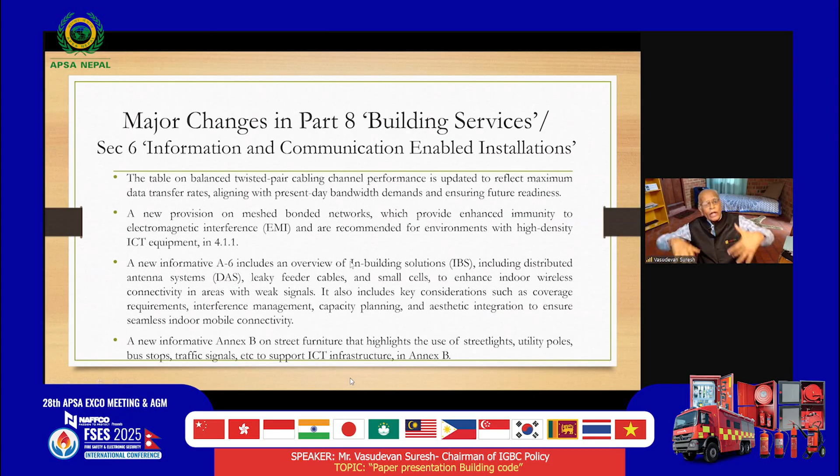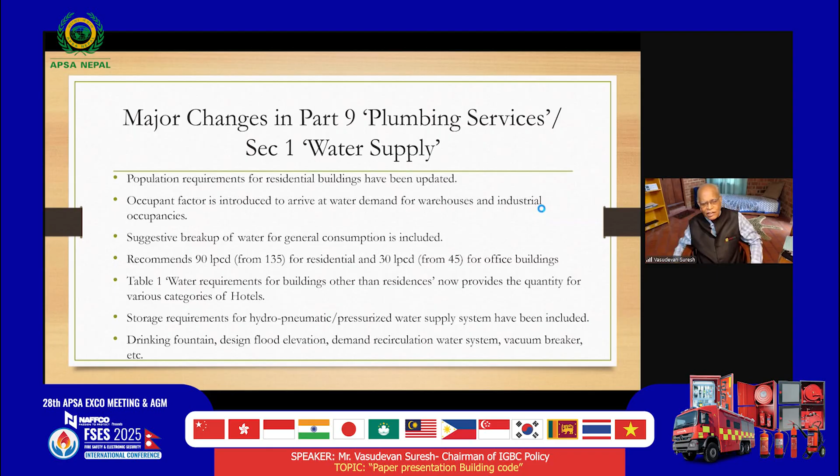Going to the next section, on drainage and sanitation - very important there, of emergency floor drain, flood level rim. We have brought in the whole issue of not only the nature of treatment required for the plumbing system, but dual plumbing system is an important component of the design. Even if you are doing a sewer and you have an STP, what type of things you require for fecal sludge management and different types of technologies for PSTPs becomes an important component - all have been covered. So depending upon your type of cities and towns, tier 2, tier 3, drainage and sanitation becomes an important component there, and this will give you all the solutions in a very large way.

More so, imagine we are going to recycle water to be used - all the wastewater to be recycled and brought in for flushing water. So you have a 2-pipe system coming over there, drinking water separately, and also the flushing water pipelines to be brought in. All these are covered in a very detailed manner.

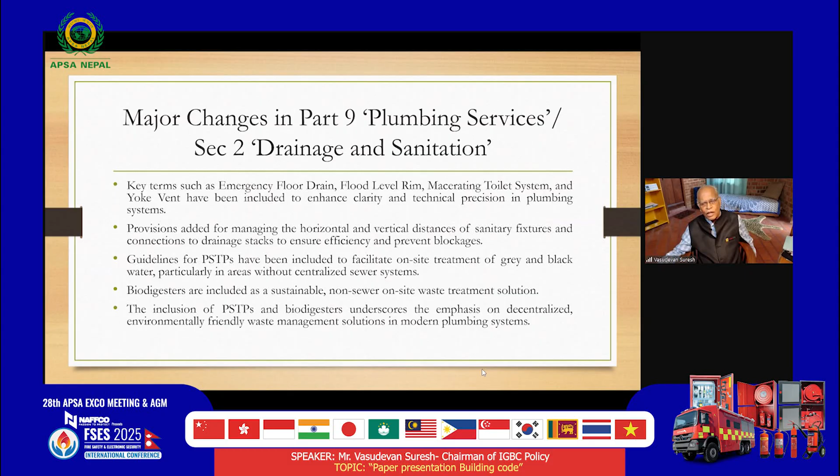That brings us to the next section on solid waste management - very important. All streams of solid waste have got to be taken care of, not only the domestic waste, but also the biomedical waste, electronic waste, including the construction demolition waste.

What type of technologies are required for not only segregating but also transporting and treating waste, including various technologies like waste to energy, have been covered. The idea is waste to wealth, refuse to resource, trash to cash or trash to treasure - a new mantra where waste management is covered in a very large way in buildings.

The environment ministry has all the rules available to deal with waste regulation. We've covered provision of refuse chutes in buildings for efficient transportation, especially in multi-story buildings, and transportation technologies that can be done at the local level, including biodigesters. All that has been covered in detail.

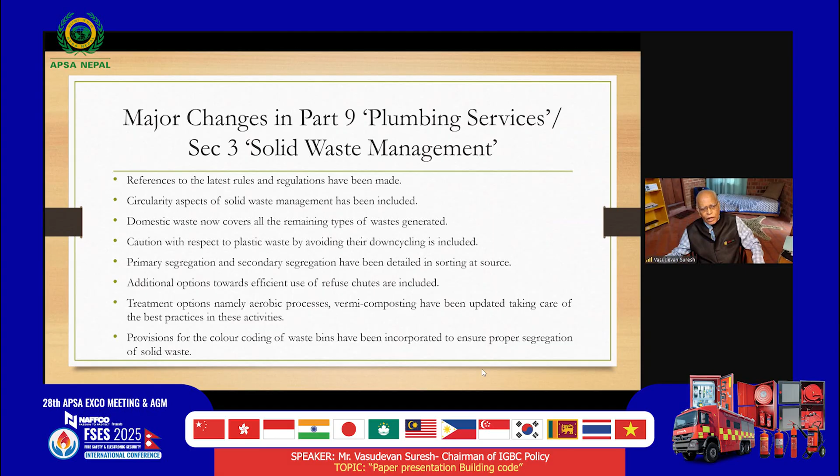That will bring us to the next one. India is, sir, already 3 more minutes, sir. Yeah, I know, we'll take 2 minutes more because we started late.

We also covered solid waste management, biodegradable waste, commercial buildings, and all concerned. As I told you, construction and demolition waste is another major area where we have good coverage. Next slide, please.

Gas supply - India is increasingly getting piped gas supply in a very large way, along with the water line, no more cylinders there. How do you deal with that?

We started addressing this not in the first version, but in the third version we brought it in, and now gas supply provisions have been added in a very large way. The safety of gas supply lines is a very important component, like other buried utility lines. Whatever safety aspects are required within the building have been covered.

We don't want a Ronan Point type collapse or bursting of a gas line. So we've covered detailed provisions on flexible gas supply connections to prevent stresses in the equipment, and ensured safety installation components for gas-powered equipment according to manufacturer's instructions. All issues on gas supply, just like water supply and electric supply, are covered as one more utility line.

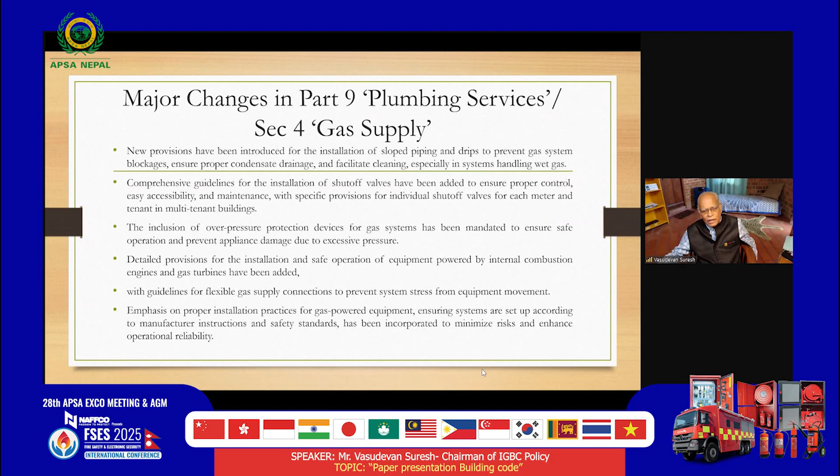This brings us to Part 10 of the building code, on landscaping planning. Section 1 is on landscaping planning design. The horticulture or landscape architecture can be horizontal, vertical, or also on the roof. All components of green will come in to take care of the heat island effect - what species to be used, the building to be green, what percentage to be done.

Singapore is a good example of so much green being provided all over, which ensures the overall built environment in a very large way. Heat island effect is brought down, water bodies help bring it down, and so the nature of plants to be used - all those details have been covered in a very detailed manner in Section 1.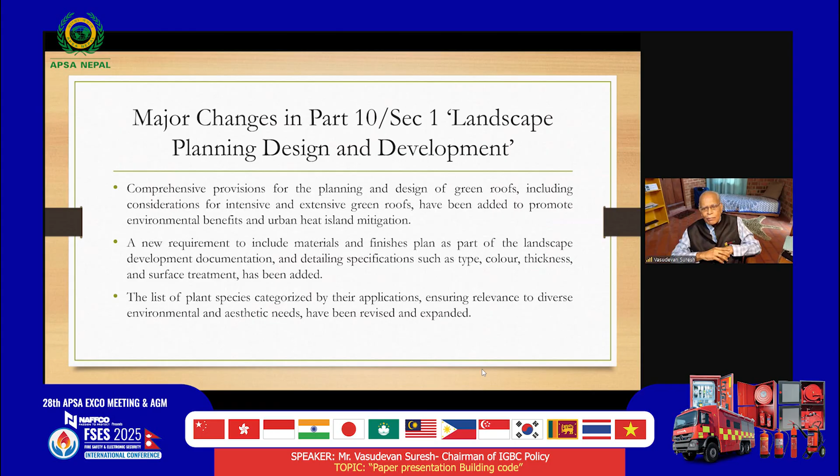Section 2, next clause - can you go to the next one please? It's on all the outdoor displays. So buildings are made, but all your hoardings are put around the building, on top of the building, or independent hoardings are there. But we had a major accident of a 100-foot hoarding.

About 30 people died because of very heavy wind - the whole thing fell down on the people there, killing them. So it's got very important safety requirements - the structural safety of signage and outdoor display structures, either on top of the building or a standalone structure, because it's important.

We've even put in the requirement of a building permit for signage, and whatever safety is required from a structural and electrical point of view, because a large number of hoardings also have neon signs or electrical night lighting. So it can also be a major area of concern.

So signage and outdoor display structures need not only structural but also electrical expertise, besides of course the design, also signage control depending upon various areas. Only specific areas where you can put signage are also covered in this particular section.

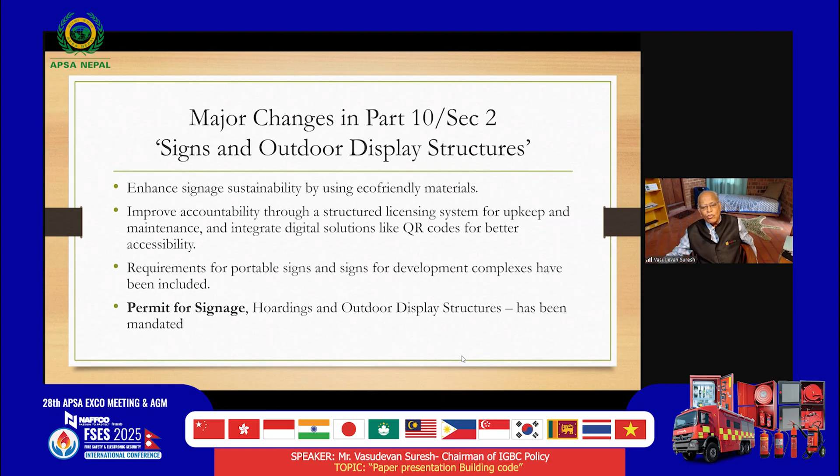This brings us to Clause 11, Part 11, on sustainability - a very important one. As I said, after the Sustainable Development Goals to 2030 were brought out in September 2015, NBC 2016 was the first Indian National Building Code to bring in an approach to sustainability in a very large way. I'm very happy that this is now being used as a model all over the world.

And this covers all issues on integrated water management, energy management, waste management, site control, all issues related to sustainability, including the building material. We also link sustainable development goals to the net zero aspect: net zero carbon, net zero water, net zero waste. All covered in that.

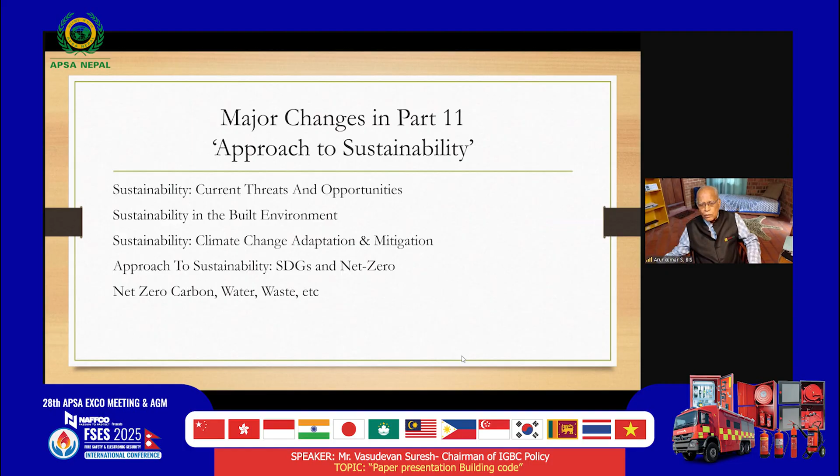This will bring us to the last part, Part 12. Can you go to the next clause? Yeah, I think one more clause of sustainability.

So we are in 2025, that's 45 years more. How do you do that in a phased manner? The net zero carbon goal is not just about operational carbon, it's all the embodied carbon of the building material.

Steel, cement, glass, aluminum are guzzlers of energy. So embodied carbon reduction is what is required, or carbon footprint reduction. Not only should operational carbon be reduced through lighting and other measures, but also the building material itself. That's a difficult area to achieve. So we have covered that aspect in a very detailed manner.

Let us move to Part 12 on assets and facility management. Again, we are extremely happy that NBC India is the only code in the world which has brought in this clause on assets and facility management, in the 2016 version.

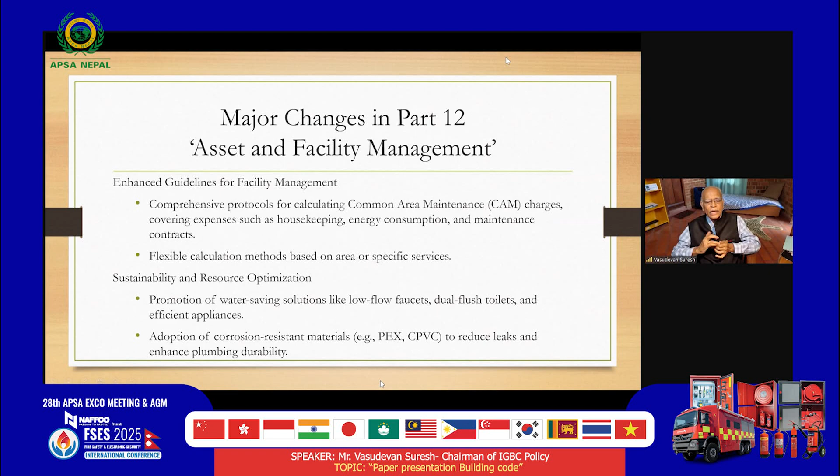It was not there earlier. This covers common area maintenance charges, including housekeeping and energy consumption details, and we now have a detailed checklist. It's very important to know how to deal with all those things.

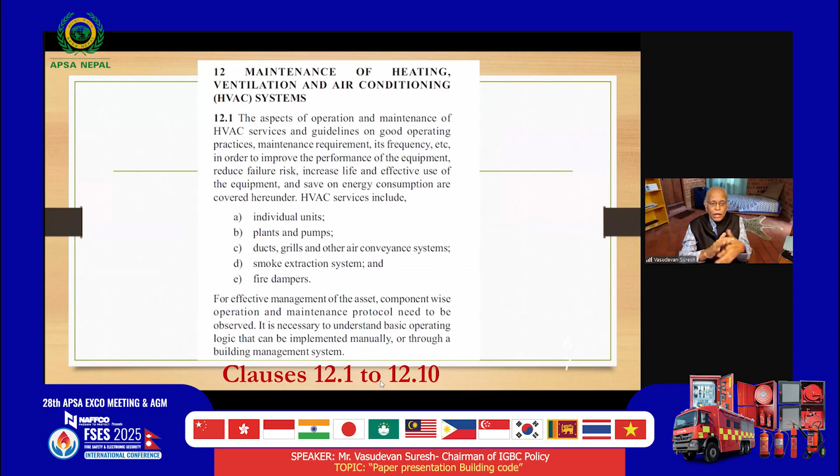So the new profession of assets and facility managers comes in. What are the checklists required for electrical installation? What do you require for lift installation? Requesting you to cover safety for that.

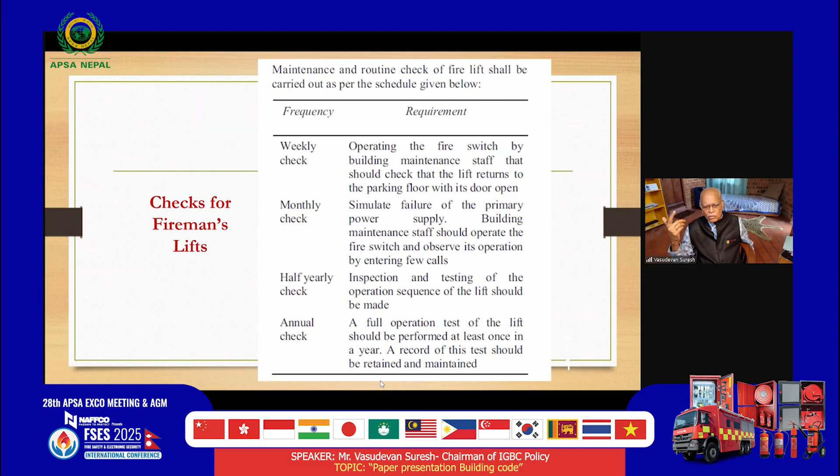These are the last 3 slides, so we have the special requirements of this. Nowhere else is this presentation available. You should learn this: it details the requirements of checklists for lifts and electrical installation, how to check maintenance on a periodic day-to-day basis so systems function when a problem occurs. Unless a good assets and facility management team is available, you will never be able to ensure those good provisions are in working condition.

When fire comes, the sprinkler doesn't work, none of the extinguishers work. These are all important provisions that must be maintained periodically. Provisions have been added, and how you deal with that is an important component to know in the life cycle of a building, at 10 years, 15 years, 20 years, where replacement is needed. All have been covered in a detailed manner.

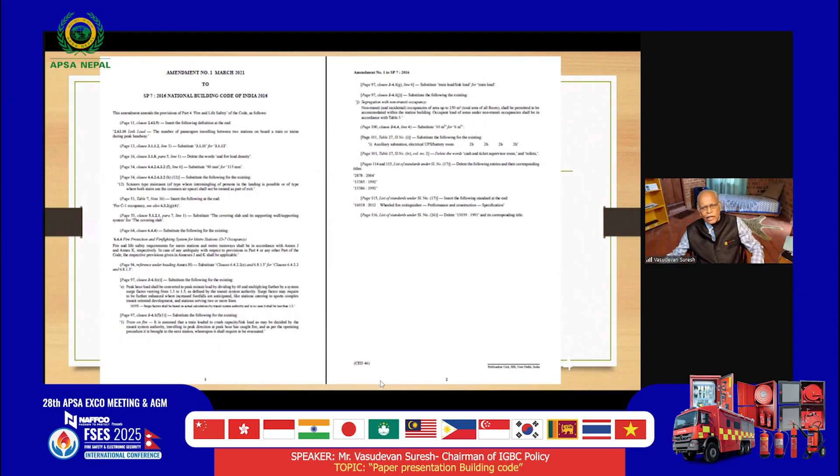And these are all available, and this has already gone to about 25,000 people all over the country and abroad. Arun and I will be very happy to get as much feedback as possible. Thank you very much for the time.